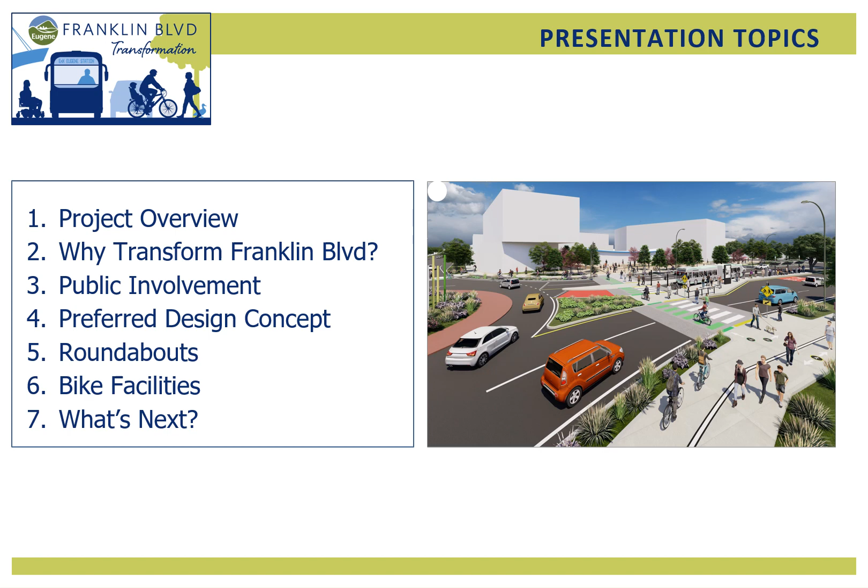So let's dive into the project overview. As it exists today, Franklin Blvd can be an uninviting, unsafe, and uncomfortable street, and this is due in part to the wide lanes that enable vehicles to move fast, often above the speed limit. For people who walk, bike, or ride the bus, Franklin Blvd can be a significant barrier to getting from place to place. Because of this, fewer people choose to walk, bike, or take the bus to make connections to, from, and between the businesses and neighborhoods on and near Franklin.

Fortunately, the future of Franklin Blvd is looking brighter. The Franklin Blvd Transformation Project is planning to redesign the Franklin corridor in ways that facilitate safe travel, meet the city's climate recovery goals, and encourage new development patterns along Franklin Blvd that serve as a more comfortable connector of places rather than a divider.

The project area focuses on the length of Franklin that exists between Alder Street to the west and the I-5 overpass to the east. It also includes Garden Avenue. The planning phase for this project first began in 2019 with high-level design concept development, a process which has involved multiple rounds of public involvement.

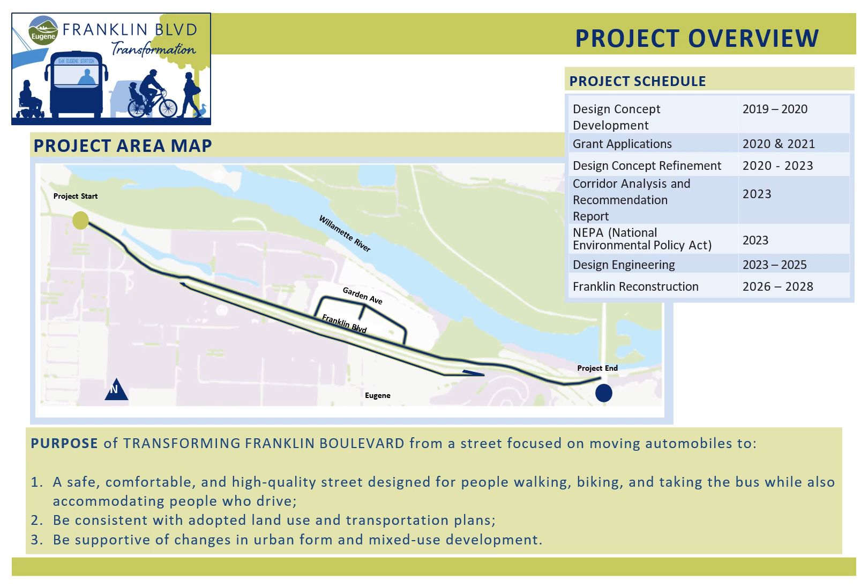More on that later. Early in the process, with the help of the community, we created a purpose statement for the project, which is to transform Franklin from a street focused on moving automobiles to a safe, comfortable, and high-quality street designed for people walking, biking, and taking the bus, while also accommodating people who drive. To be consistent with adopted land use and transportation plans, and to be supportive of changes in urban form and mixed-use development.

So why are we doing this? Why are we even looking at Franklin? We hit on it a bit in the purpose for this project. We're doing this to address safety, climate, and urban growth. We have adopted plans that address each of these topics.

Our Vision Zero action plan identifies actions to eliminate all deaths and life-changing injuries that occur on our transportation system. The Climate Action Plan 2.0 lays out actions necessary in the realms of transportation, energy, and waste to achieve the city's climate recovery ordinance, which has greenhouse gas emission reduction targets. And the Walnut Station Specific Area Plan, which includes strategies for compatible infill, higher density living, and mixed-use development through a combination of land use and transportation planning and infrastructure investments.

Safety for all people is a guiding tenet in all of the work that the city does. When it comes to our roads, 65% of all crashes in Eugene that result in a person dying or sustaining a life-changing injury, like a brain injury or a lost limb, occur on arterial roads. And in case you're wondering what an arterial road is, it's an urban road that carries a lot of traffic, less than a highway, but more than a street that runs through your local neighborhood.

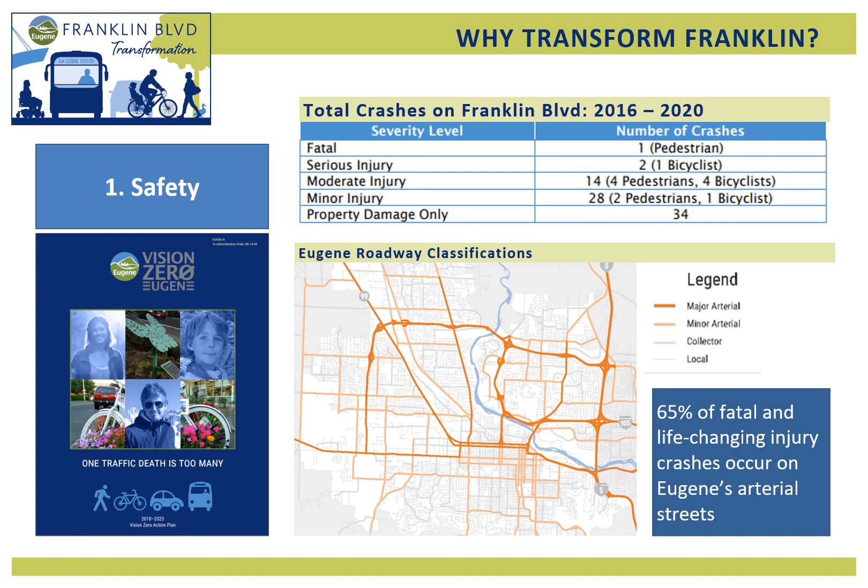Franklin Blvd is an arterial road. In the 5-year period between 2016 and 2020, 79 crashes occurred along the stretch of corridor, one of which resulted in the death of a person who was walking across the street, and 2 resulted in life-changing injuries, including a person who was riding a bike. Redesigning Franklin will help us make sure that no person involved in a crash or collision at some point along the corridor dies or sustains a life-changing injury as a result of that collision.

When discussing climate recovery, it's important to note that in Eugene, 53% of all greenhouse gas emissions come from the use of gasoline and diesel in transportation. A transformation of Franklin Boulevard that creates safe, continuous, easy to access space for people to walk, bike, roll, and use transit will help make it easier for people to use forms of transportation that don't require the same amount of gasoline or diesel use as a car being driven with only 1 or 2 people in it. So that in turn helps us meet our community goals towards climate recovery.

And lastly, the area around Franklin Boulevard is growing and changing as we speak. Since planning for the Franklin transformation began in 2019, three new buildings have already opened their doors: the 959 Franklin Apartments, the Knight Campus for Accelerating Scientific Impact, and the Hayward Inn. Additional developments are in the works both on and near the corridor, including additional apartment complexes, the redevelopment of the site where the Chevrolet dealership once was, known locally as the Romania lot or the Potato Chip Building, and the construction of a brand new mini district along the downtown riverfront.

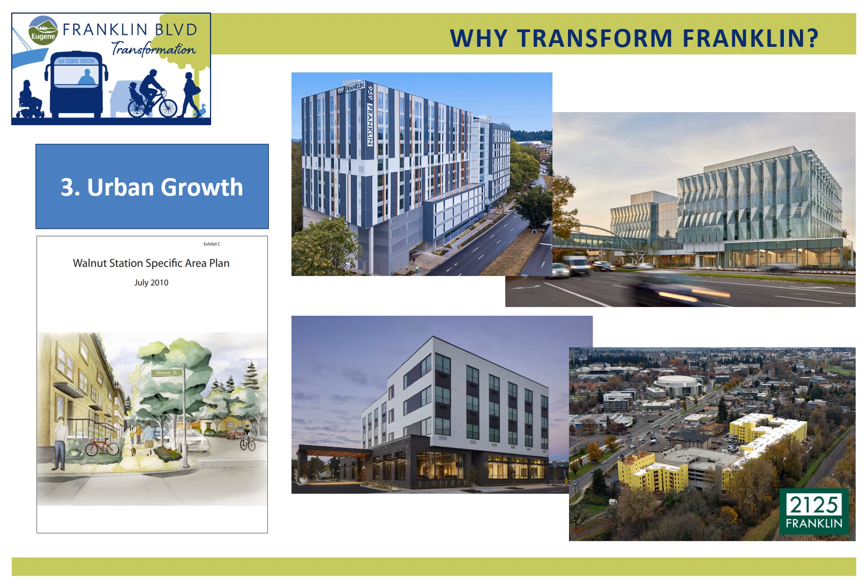All of these developments are increasing the number of people who travel to or live on and near the corridor. They need to be able to move along and across the corridor to access jobs, education, grocery stores, pharmacies, parks, and more. A transformation of Franklin will help them and everyone else who uses the corridor to do so.

In order for planning to transform Franklin to even begin, a couple of things have to happen first: jurisdictional transfer of the street and the adoption of Eugene's 2035 Transportation System Plan.

Because Franklin Boulevard is situated along parts of Oregon 99 and Oregon 126, decisions related to its form and operations were previously made by the Oregon Department of Transportation. But over the course of 12 years and two jurisdictional transfers, one in 2006 and one in 2018, ownership of the majority of the street was transferred from ODOT to the City of Eugene.

Currently, ODOT ownership resumes approximately half a mile east of Walnut Street, which is in the vicinity of Riverview Street.

Additionally, adoption of the TSP gave city staff direction to, and I quote, examine options for improving bicycle and pedestrian access along Franklin Boulevard from the city limits to Alder Street, and will be accomplished through a planning process as called for in the Walnut Station Mixed Use Center Plan. With the second jurisdictional transfer in place, staff were able to begin working on a plan to transform Franklin Boulevard.

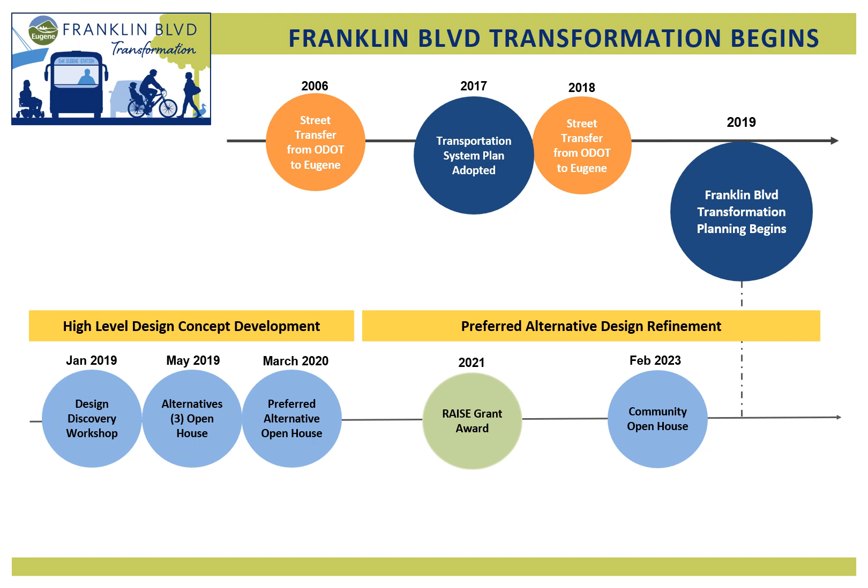On day one, we shared the project with attendees: what it was, why we were doing it, and what we hoped to ultimately be able to deliver — a design for a new Franklin Boulevard that works for all people and all forms of transportation. We then broke the attendees up into groups and asked them to identify what was working on Franklin, what wasn't, and what their hopes were for a future Franklin. The meeting was recorded and live streamed on the YouTube channel and Facebook.

On day two, we held open studio hours where the community was invited to see the progression of design work. The afternoon open studio allowed Eugenians to see designers at work and peek at initial ideas for the corridor transformation. Members of the public were able to chat with designers and provide comments on the initial designs.

On day three, we held interviews with representatives of different stakeholder groups: active transportation advocates, business and property owners, staff from LTD and the UO, and more.

On the final day of the workshop, we held our first design reveal, where we showcased the week's design concept work. Designers presented a series of possible street cross sections and intersection designs, along with information about how options impact the way people traveling by different modes use the corridor. The event was a formal presentation with a structured question and answer section.

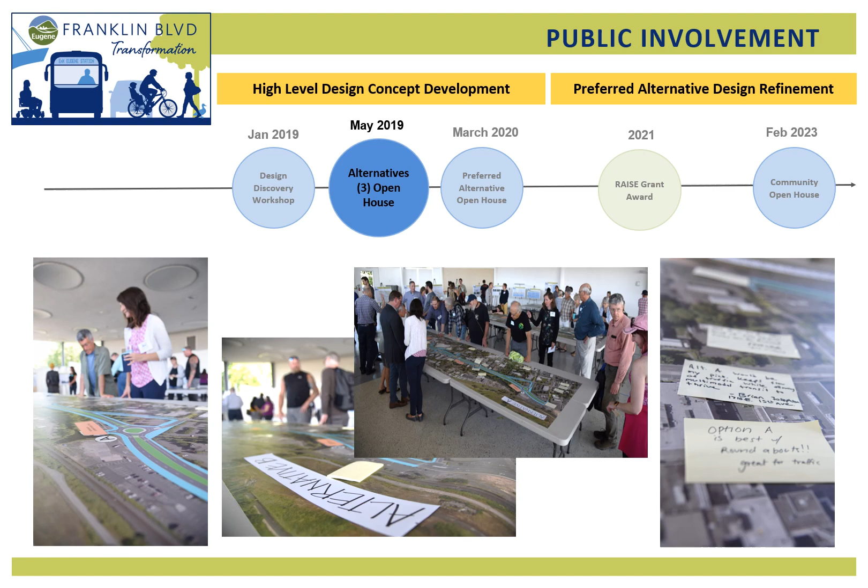Taking everything we learned and accomplished during the January workshop, staff developed three possible corridor design alternatives that were presented in an open house style event in May of 2019.

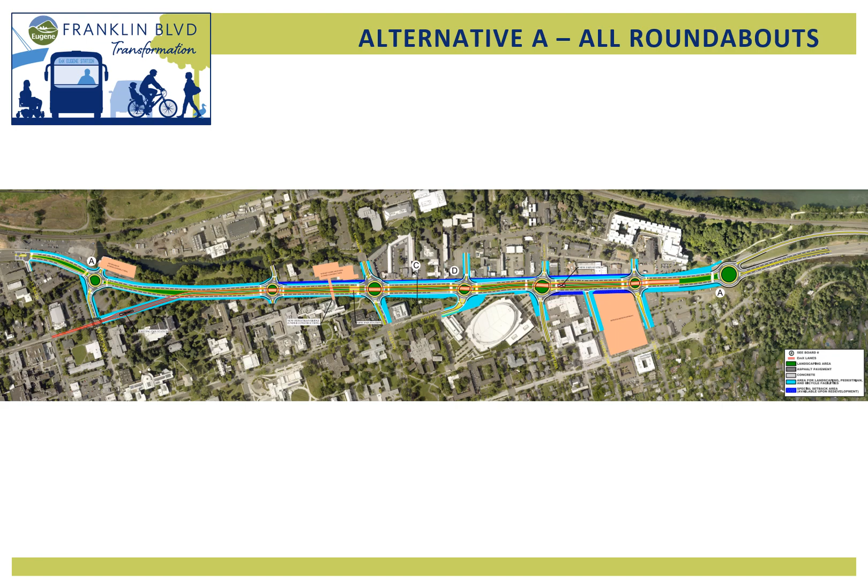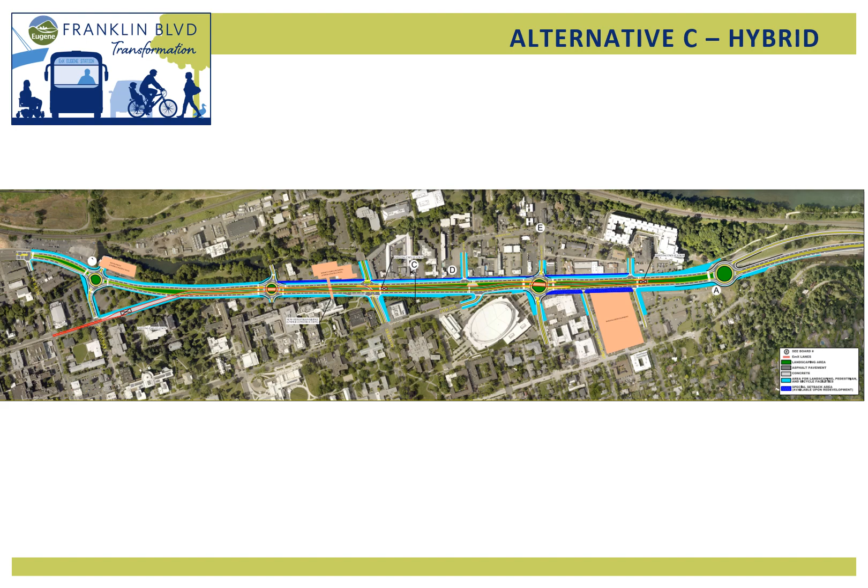The first design alternative planned for all intersections to have roundabouts. The second design alternative planned for every intersection to be signalized. And the third design alternative was a hybrid combination of roundabouts and signals.

When looking at the three design alternatives, staff evaluated various trade-offs and selection criteria, such as how each design alternative impacted traffic flow, ease of crossing, and allocation of space for landscaping.

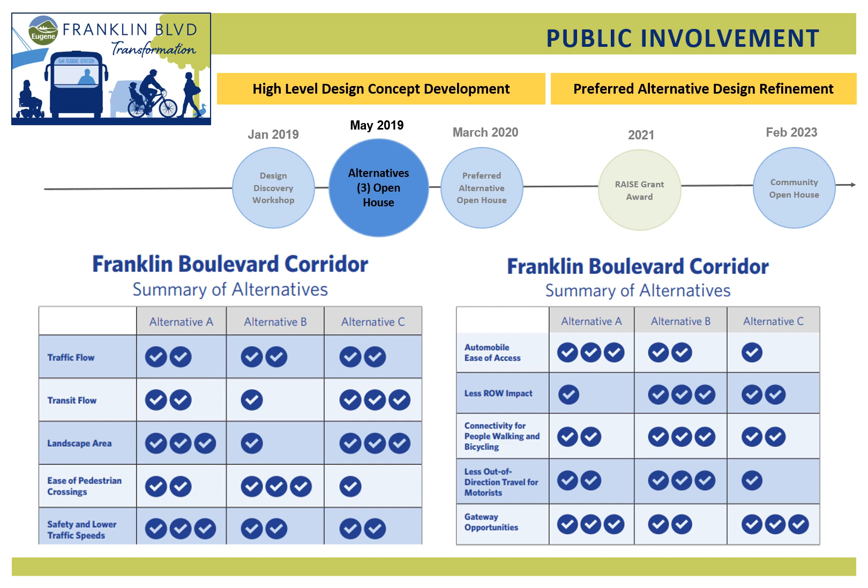Following the in-person open house, a survey was published online where people were able to answer questions about the trade-offs to help us better understand what mattered most to Eugenians. Public input from both the in-person event and the online survey helped inform which design alternative to move forward with.

That decision was revealed at the March 2020 Preferred Alternative Open House, where we shared the design selected to move forward with: a modified version of the hybrid design alternative.

As usual, all materials shared at the live event were also published on the project webpage, and feedback gathered both in person and online continued to guide staff.

At this point, we all know what happened on the larger scale of events. One week after the Preferred Alternative Open House, direction to stay at home was given. We all took a hiatus from public events for a couple of years, but during that time, staff continued to work on the project.

In partnership with the City of Springfield, and with support from Lane Transit District, we submitted grant applications for federal funding for the project. In 2021, both cities were together successfully awarded $19 million in funding via the Rebuilding American Infrastructure with Sustainability and Equity, or RAISE, grant for the project.

The total cost of the project is more than the amount of funding received, so project completion will occur in phases. In Eugene, the RAISE grant will be used to...

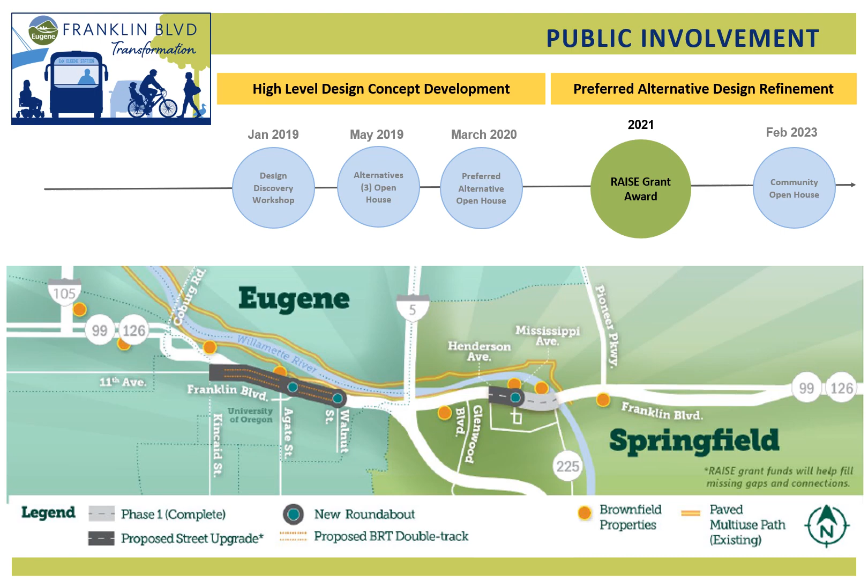We also continued to refine the design presented at the March 2020 open house based on input from Eugenians, transportation professionals, and stakeholder groups such as business and property owners.

On February 2nd, 2023, we presented that work at an open house event packed with community members. Everything shared at the open house is posted online, and we are accepting comments on the design through email, phone calls, and our online engagement platform, Engage Eugene. The online open comment period is open until March 5th, 2023.

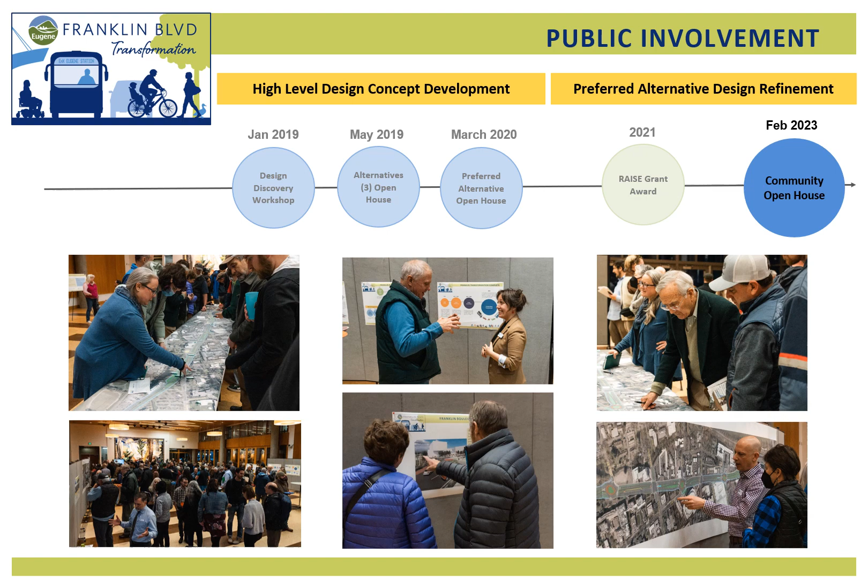All feedback gathered will be used to continue informing design refinement as the project moves forward into the engineering phase of design development. But first, let's take a look at the current design and how it's changed since 2020.

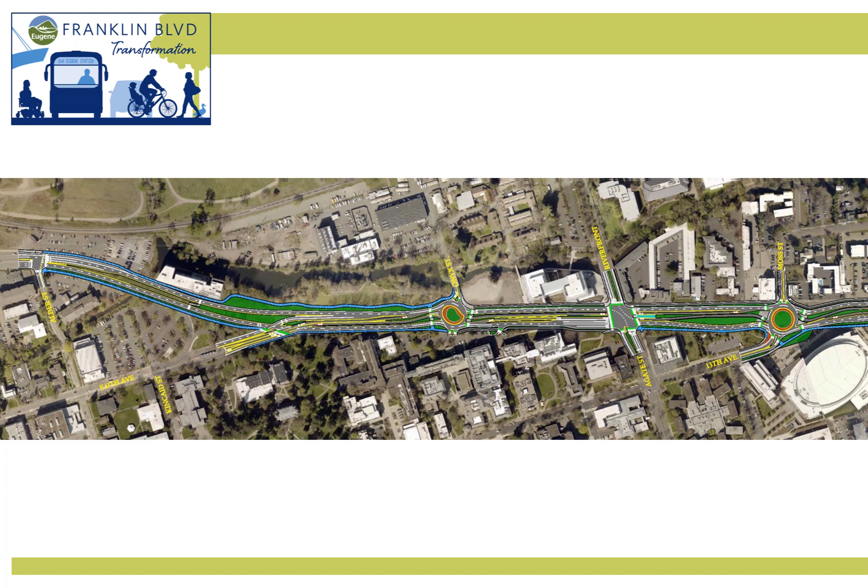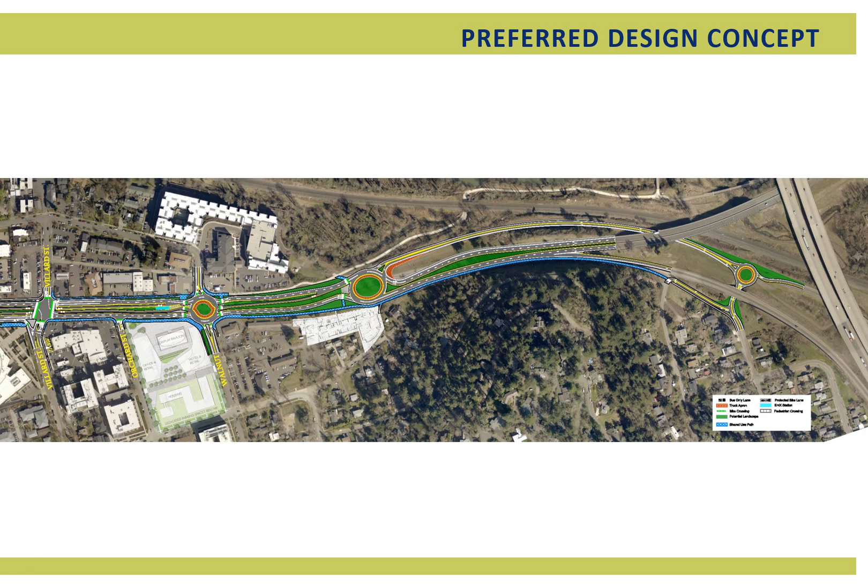All right, I know that was kind of fast, but don't worry, we're going to go more into it. So let's look at this section by section.

We'll start with looking at the section between Alder Street and ending just shy of Onyx Street. We're going to start on the west end of the corridor and make our way east. Here, the most notable difference on the western end is that we've removed that initial western gateway roundabout that we were planning.

We were originally planning on doing that western gateway because it was meant to act as a complement to another gateway that we have planned on the eastern end. Together, they would have formed like a bookend on either side of the corridor to help indicate a transition into and out of the area.

It was removed to lessen out-of-direction vehicular travel and impacts to property belonging to both the University of Oregon and Bushnell University. An additional change to this part of the corridor focuses on walking and biking near the mill race.

In the 2020 version, there was both a shared use path and a sidewalk running parallel to the mill race. In the current version, however, due to spatial constraints, we've removed the sidewalk, but are keeping the shared use path.

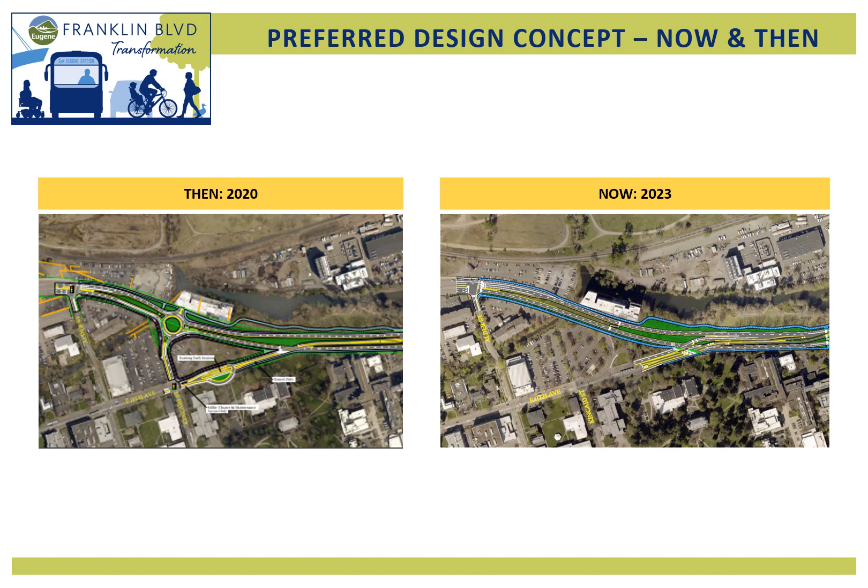Going east, the next portion of the corridor we're looking at is between Onyx and Moss. No major changes have occurred here since the 2020 design. Both versions include roundabouts at Onyx, a signalized intersection at Agate, and both include a major component of the project in general: the construction of a brand new intersection where Franklin Boulevard, 13th Avenue, and Moss Street come together.

Currently, people leaving the Matthew Knight Arena who want to go to any of the businesses across the street, like Tracktown Pizza, Pig and Turnip, or the Hayward Inn, if they want to cross an actual crosswalk, they need to choose between the crosswalk at Agate or the crosswalk at Villard.

And there's a quarter mile in between those two crosswalks, so what most people do is just choose to test their luck and dash across the street instead. Putting that roundabout intersection there will really help with that.

Between 2020 and today, the only change of note that's happened in this segment is one that is actually pretty consistent throughout the entire corridor design.

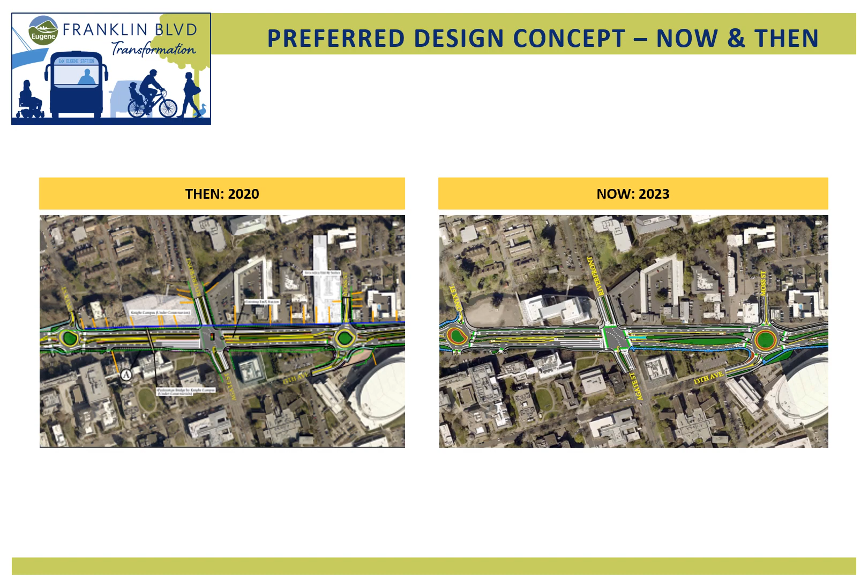Whereas in the current version, the north side of Franklin is mostly a protected bike lane, and on the south side, it's mostly a shared use path.

Continuing east, the next section looks at the area between Villard and where Franklin starts to transition into what feels like a highway. In this area, the most notable change is the inclusion of a left-hand turn onto Villard for traffic traveling west on Franklin.

This was not part of the 2020 design. We heard concern expressed from businesses and property owners about the impact that was anticipated from removing that westbound left.

So we consulted with our project engineers and determined that reintroducing the turn was a viable option.

Again, spaces designed for people to walk and bike have been made more consistent, and the intersection types are largely unchanged. Villard is signalized, there is no designated crossing at Orchard, and Walnut has a roundabout.

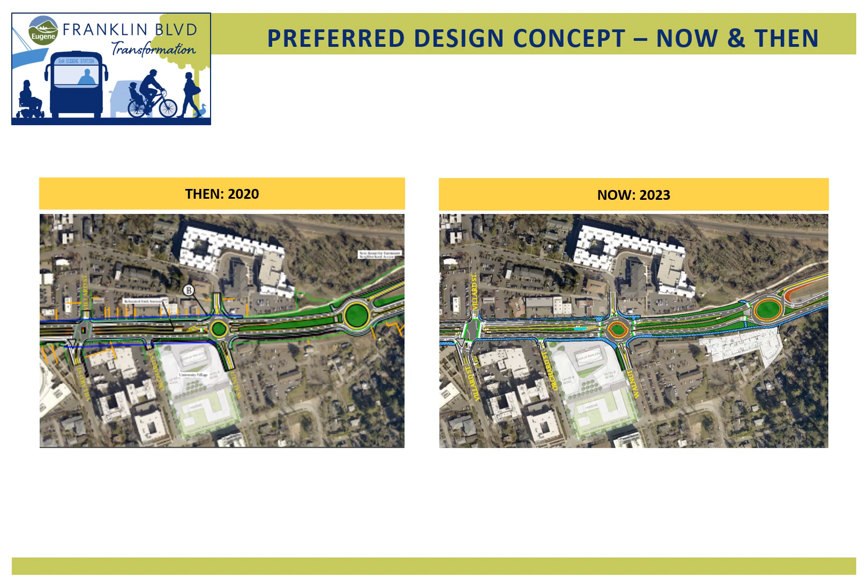And there is that Eastern Gateway roundabout there. Lastly, in the far east of the project area, one final roundabout is planned for where the I-5 off-ramp and Riverview Street meet.

Here we're proposing to close the entrance into the Laurel Hill Valley neighborhood from the I-5 on-ramp, and instead make the I-5 off-ramp two-way.

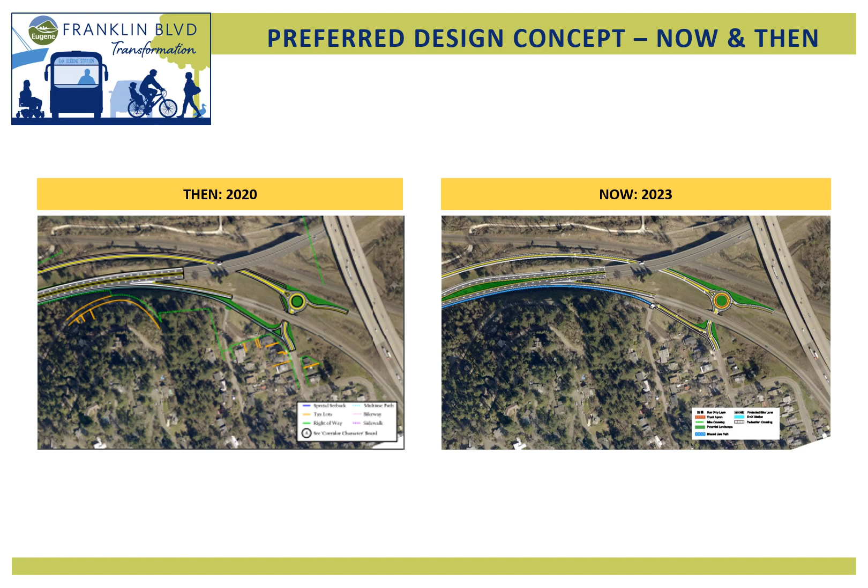This will make it safer for people to bike into and out of the Laurel Hill Valley neighborhood. The design of this area has not significantly changed since that 2020 design.

At this point, I'd like to discuss roundabouts. You likely noticed that there are a number of them included in the design and may be asking why. Well, that's because they're great tools for helping us meet the project and city goals of safety and climate recovery.

Additionally, they help save money for both the person traveling through them and the city at large. The tight circle of a roundabout forces people driving to slow down, and the angle of travel helps people driving better see what's around them.

This results in fewer severe types of intersection crashes. We're talking about right-angle crashes, also known as T-boning, and left turn or head-on collisions.

This means that 35% fewer crashes occur overall, and if a crash does happen, the chance of death or severe injury is greatly reduced due to the slower speed.

It also results in a reduction in the number of collisions between people driving and people walking or biking. Roundabouts also improve traffic flow, which indirectly benefits the environment.

By reducing the amount of time cars idle waiting at stop signs or signals, the amount of air and noise pollution that results from idling is reduced. It also reduces the amount of fuel consumed by an idling vehicle.

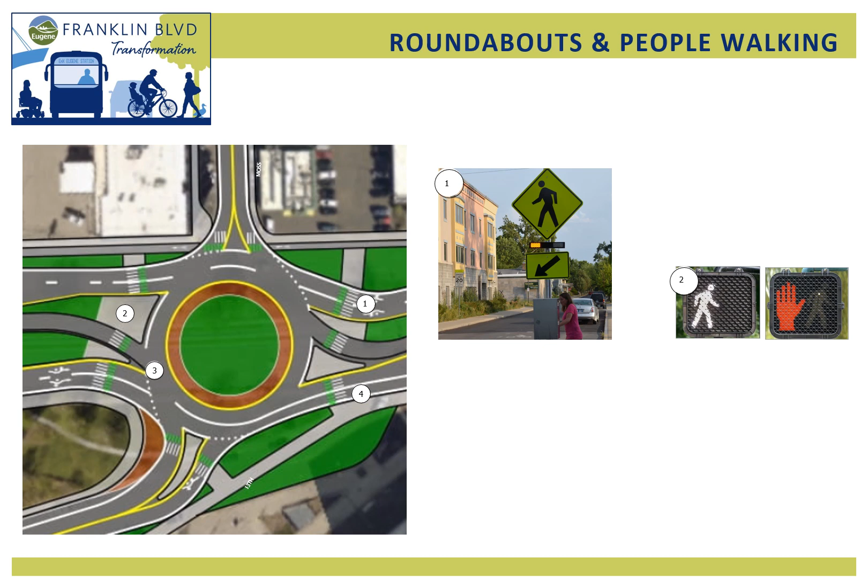Once the person walking has crossed the general traffic lanes, they'll next approach the bus-only lane. The signal to cross this lane will rest on walk, but if a bus is approaching, it will be detected ahead of the crosswalk and automatically change the signal to don't walk. Once the bus passes the crosswalk, the driver will wait and yield to circulating traffic in the roundabout before entering it. When exiting the roundabout and re-entering the bus lane, buses will wait for people crossing Franklin as other drivers would.

And then people walking across Franklin will cross the remaining general traffic lanes, traveling in the other direction.

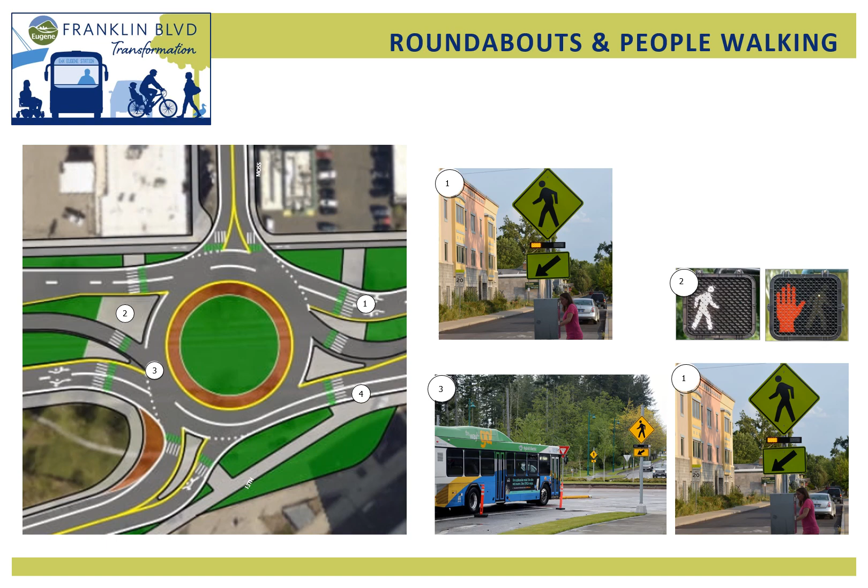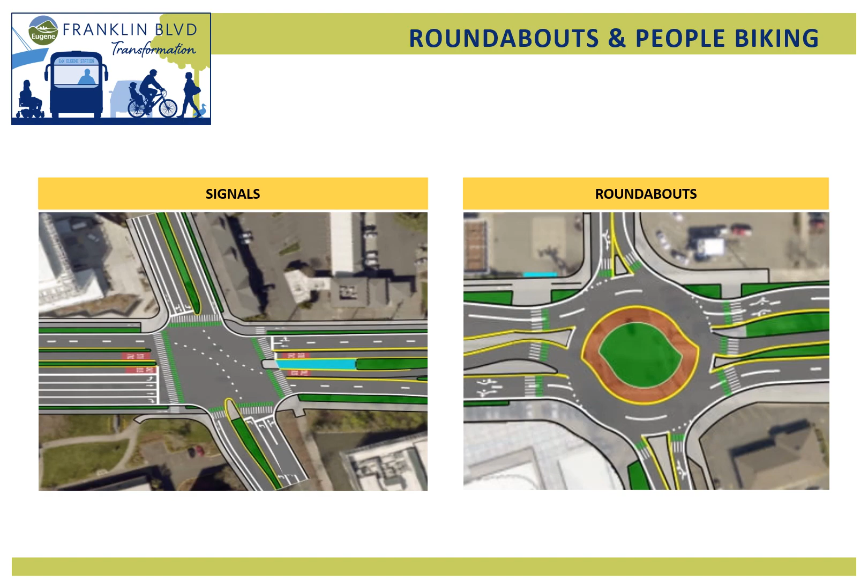So how will people biking navigate intersections at Franklin? At signalized intersections, like the ones planned for Agate and Villard, people biking who want to take a left-hand turn will proceed through the intersection and wait on the far corner to complete a two-stage turn. When crossing, people on bikes will have their own crosswalk in green, separate from the crosswalk for people walking in white. At roundabout intersections, people biking will go around it using the bike facilities and the green bike crosswalks, traveling in the same direction as people driving to make turns, counterclockwise. People biking will need to look for yielding drivers when crossing side streets on Franklin in the same way that people walking will.

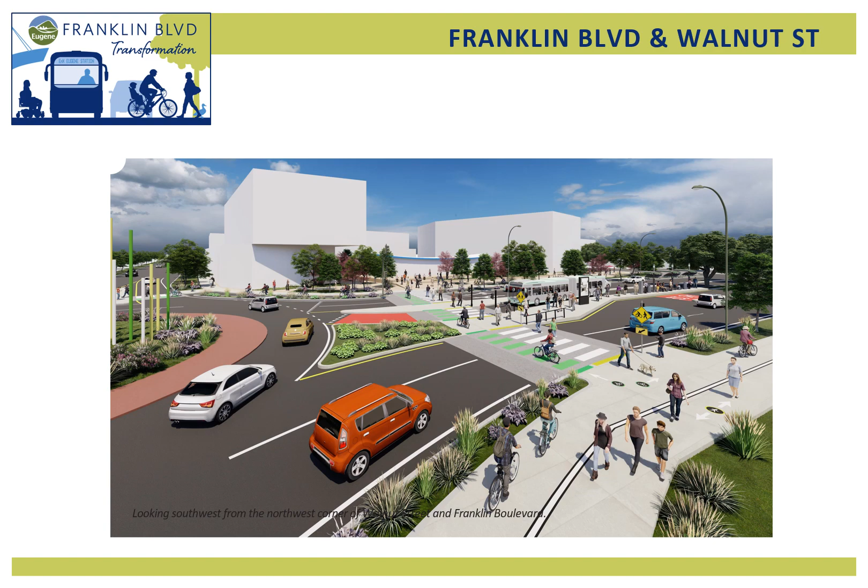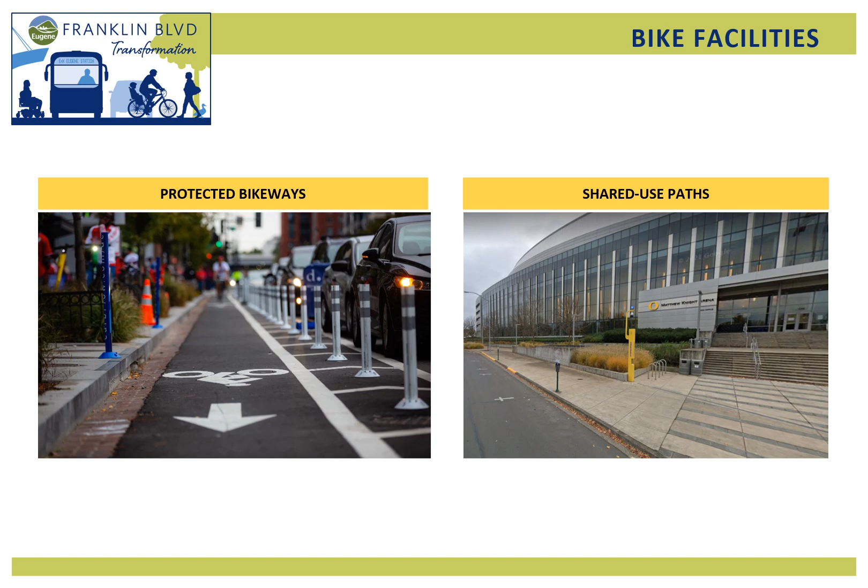As for the bike facilities, we're looking into potentially using two different types: protected bikeways and shared use paths. Protected bikeways are like sidewalks for people on bikes. They use physical separation, such as the vertical plastic barriers shown in the left-hand picture, to create a space for people biking separate from the space where people drive. Shared use paths are like wide sidewalks that both people walking and biking can use, with a space separate from where people driving vehicles are. Where protected bikeways are designed to be used only by people biking, shared use paths are designed to be used by both people biking and walking.

Our current design mostly plans for protected bikeways, depicted here in purple, on the north side of the corridor, and mostly plans for shared use paths, shown in green, on the south side.

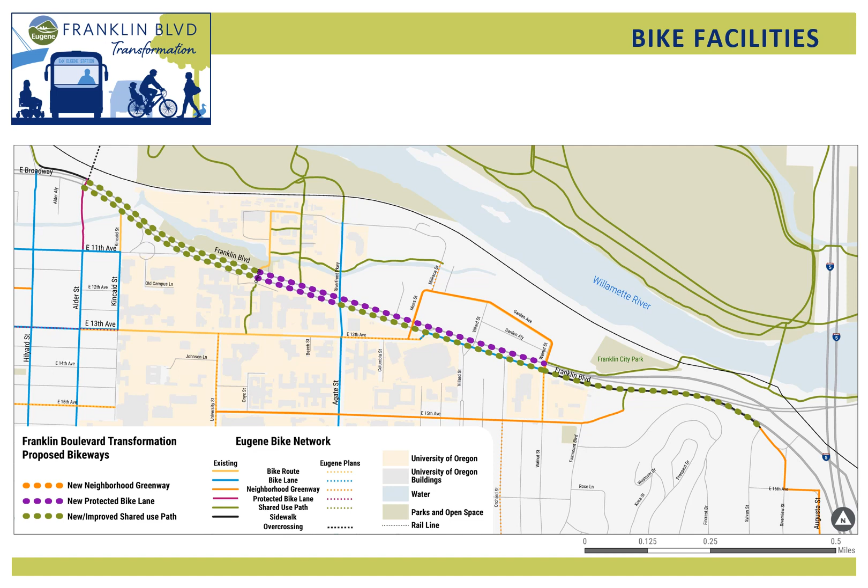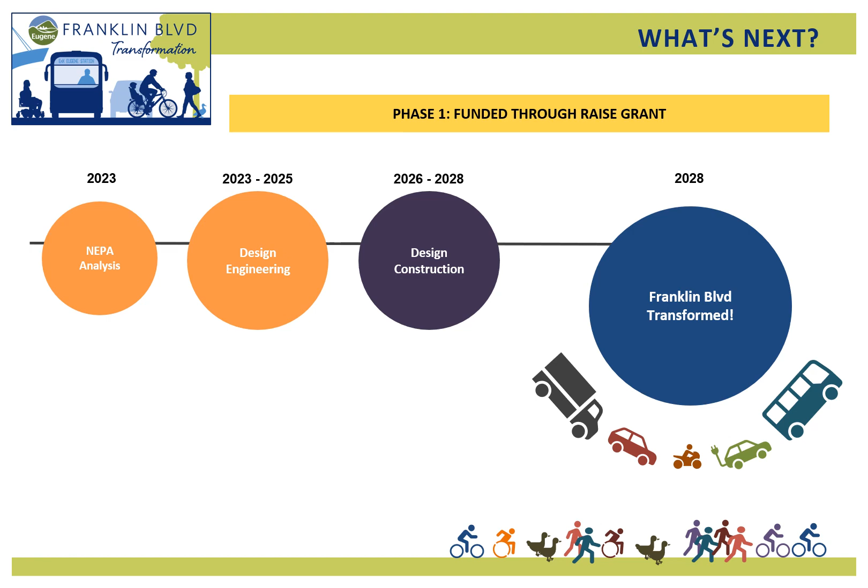Looking ahead at what comes next, we're currently beginning the NEPA analysis process for phase 1 of the project. The design is close to transitioning from the planning stage of development to the engineering phase, where a lot of the more fine-tuned details will be worked out—things like where exactly driveways and trees will be located, and the exact angle at which vehicles will approach intersections. Once the engineering phase is complete, construction will begin. At that time, care will be taken to ensure that access to businesses will be maintained. As it stands, construction of phase 1 is anticipated to be completed in 2028.